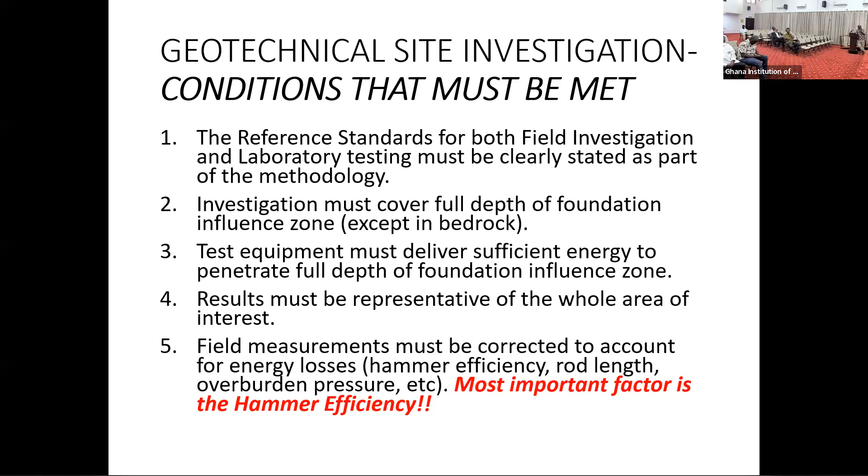The depth of investigation is critical for settlement analysis. It is influenced by the magnitude of the applied load - the bigger the load, the greater the depth you must be interested in. And the depth of influence of the imposed load is below the depth at which the load is applied. It's not necessarily just from the ground surface, but the effect takes place from beneath the loading point. Then, of course, the geometry of the plan area of the stress area - if it's rectangular, if it's a strip, if it's a square - all those things affect the depth of investigation.

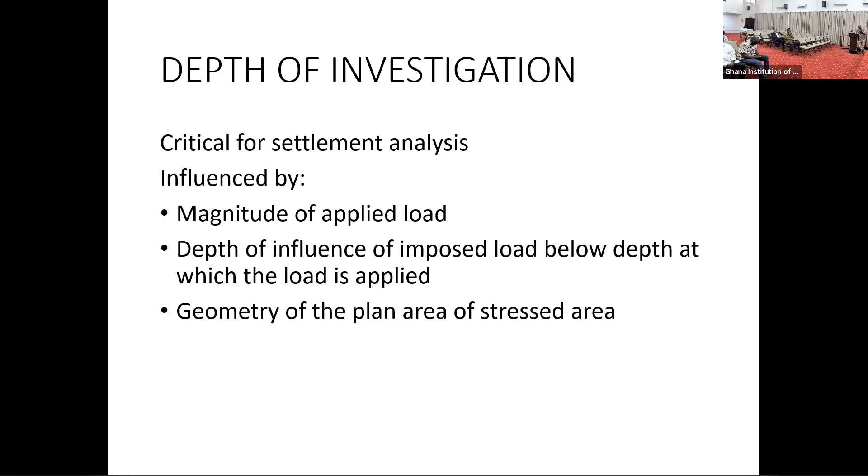There's some guidance for the depth of investigation. These days, the Eurocode has become very popular. Eurocode 7 is very clear. When we started, I said that the reference standards must be clear. If you go to Eurocode 7, it tells us what the depth of influence should normally be.

So you see the first one is a rectangular footing. So for a breadth BF, it has a certain depth of influence. The other one is more like for a basement or a structure - that one also has a certain depth. The next slide gives us guidance on the depth.

I jumped this one. For high-rise structures and civil engineering, this is from Appendix B in the standard. It's not what I think, it is what the standard says. For high-rise structures and civil engineering projects, the larger value of the following conditions should be applied. The ZA typically to be greater than or equal to 6 meters - by this it simply means the minimum it must go is 6 meters. And the ZA is 3B.

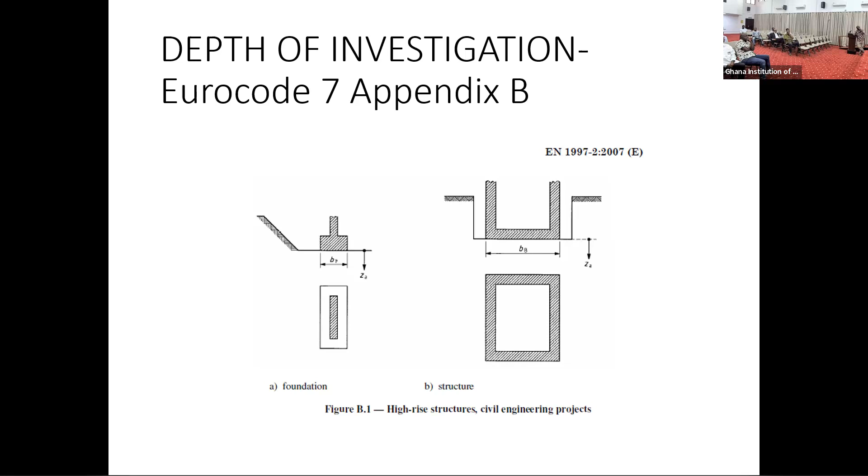So for ZA, this is the first diagram on the left. If it's an isolated pad footing, what they are saying is that depth of influence, you must go to a point 6 meters below the footing. If it is more like a basement structure, there's a BB - that one is 1.5 times the width. That is what the standard says. And then there's also some guidance with the raft footing.

All I'm saying is that if you choose to operate under this standard, be guided by its steps. Don't just do anything and then walk away. See that you are operating under the Eurocode. Once you're guided by operating under this code, this is the guidance.

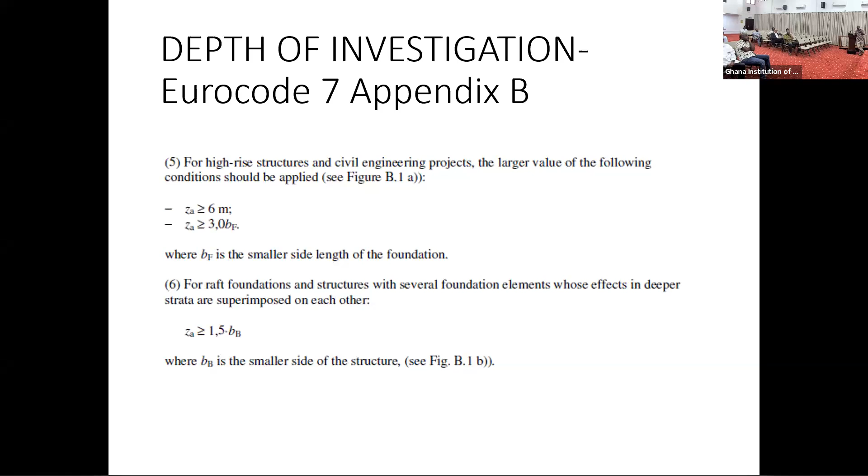Typically, how do we do this geotechnical investigation? We have the geotechnical side for drilling, SPT sampling, pit excavation, plate load test, dynamic probing with window sampling, cone penetration - all the geotechnical, intrusive methodologies. Then we also have the geophysical, which to a large extent is either seismic or at times electrical resistivity. The combination of these two approaches tends to give very comprehensive and representative data. If you combine them well, the information you get allows you to do a good design.

When you hear that there's a tremor, you don't wake up at night thinking, is that my project or what? That's the whole thing about doing the right thing and using the standards. So if you combine two approaches for a typical field investigation, you can sleep well.

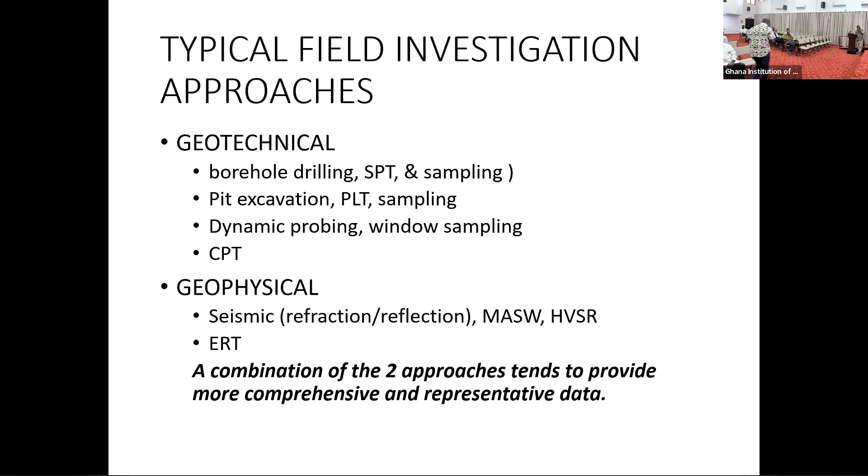So let's look at the approaches. The standard penetration test - under the Eurocode, that's the reference, BS and ISO. Now all countries have combined their standards together and have a unified group, and under this unified 22476 part, they have a standard penetration test.

Everything you need to know is there.

This is the most universally accepted geotech field test procedure for assessing ground strength for structural foundations. It's very useful in granular material, especially sand and gravels, which tend to be difficult. So for me, that is a standard practice. All the other things we do, we are trying to work towards that.

It has a very high hammer driving energy, 238 kilojoules per meter squared. Because of this level of energy, it is able to penetrate most types of soil formations, at least the ones we encounter in this country. So the full influence zone is covered, typically up to 15 meters, at times more. When you use the SPT, that is actually the standard, but it is not always that good access to the SPT, but that is the standard practice. It has ancillary tools that allow you to go through very hard material, chisels and all those things.

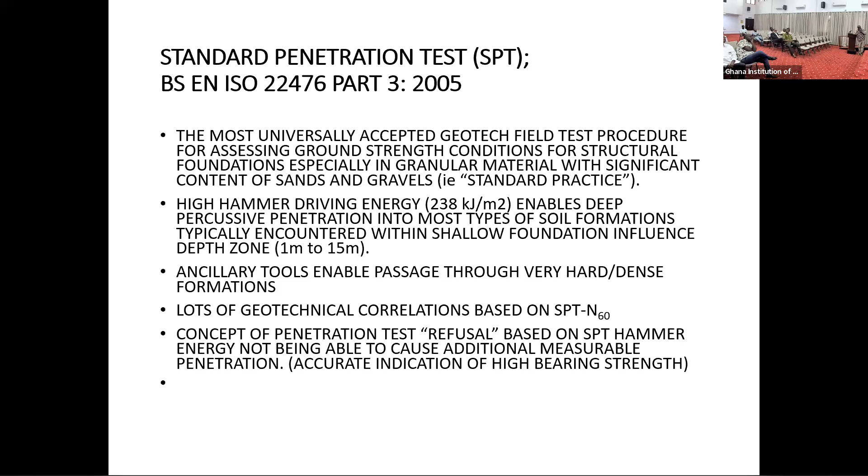So the SPT is a standard, but in addition to the SPT, there are other approaches, like dynamic probing for foundation investigation. That is the same standard, part 2. BS EN ISO 22476 part 2 talks about dynamic probing, part 3 is the standard penetration test.

Dynamic probing describes four procedures, differentiated primarily by the hammer weights. There's DPL, which stands for dynamic probing light. We have dynamic probing medium, dynamic probing heavy, and dynamic probing super heavy. They all have their energy levels.

Now the basis for selecting which type to use should be the drive energy. The driving energy basically means the hammer must drop by gravity, free fall, for a certain distance. For the SPT, it is 63.5 kilograms dropping 750 to 760 millimeters. That is the hammer energy. All four of these have their own energies.

So in any particular situation, you must look at your formation. That's how come we say this geotech business should be done by people who understand the geotech thing and the geology and all that. You must look at the formation before you decide what to go for, bearing in mind that you have to go through the full depth of influence.

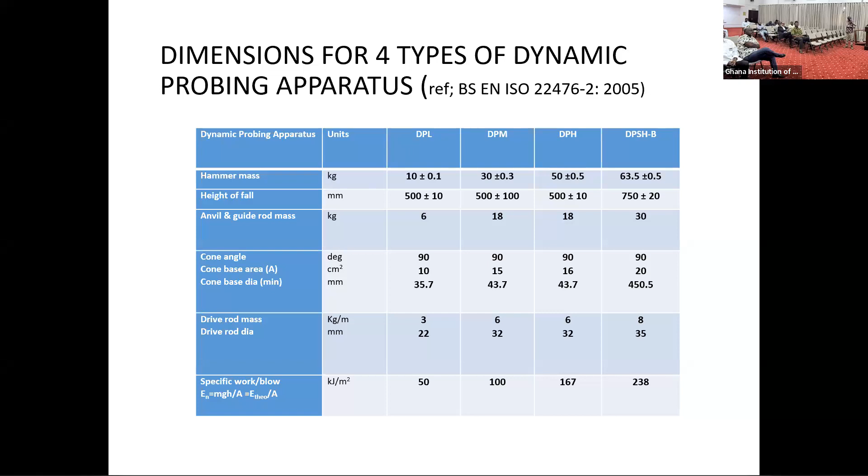Okay, so let's have a look at the 4 types of dynamic probing apparatus. The reference is still the 22476 part. All of this is just extracted from it, none of it is mine. This is in the standard. Okay, so the hammer mass.

The DPL, which is the light equipment, has a hammer mass of around 10 kg plus or minus 0.1. There's an intermediate one which has 30. And then you come to dynamic probing heavy, that one is a 50 kilogram drop weight.

And then the DPSH, I have to mention because there are basically different types of DPSH. Some prefer to use the 20 centimeter increment, but the DPSH typically is 10 centimeter depth intervals. The height of drop: the DPL drops 500 millimeters, DPM 500, DPH 500, and the DPSH drops 750. So the DPSH, in terms of energy, is actually equivalent to the standard penetration test.

The rods also play a part in the interpretation, so you must know the weights vary. The lightest one is 6, goes to 18, and the DPSH guide rod mass goes up to 30 kilograms.

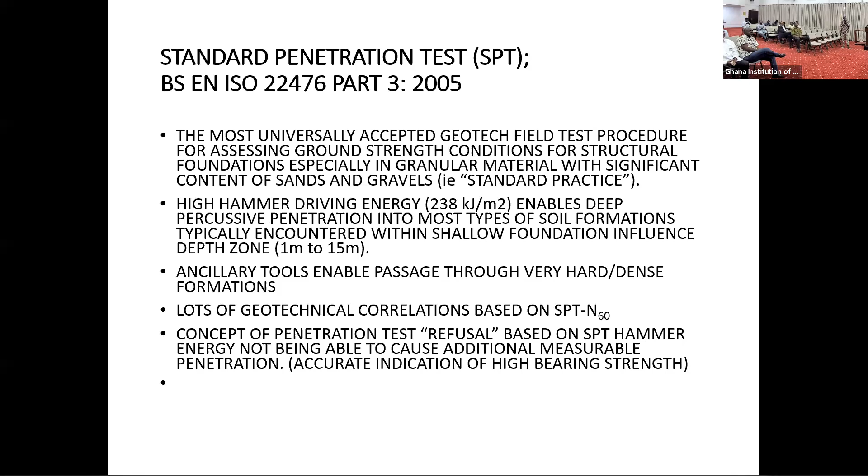When you go back to the SPT, it has the same value, 238. The difference between the SPT and the DPSH is the fact that the SPT drives an open sampler, and the SPT is carried out in a borehole. Because of that, there are a lot of energy losses in the DPSH which don't occur in the SPT.

So you must know all of this before you try to interpret the results. Don't just equate them - I've seen reports where some people think the two are the same. They are not, they are not. The side friction is different. All sorts of things are different, but you must have this basis before you can have a good appreciation of what's happening. So this is the information on the 4 types.

And like I prepared, these are dynamic probing. So normally when I say DCP, I don't need any of this - I do not mean the light system, that for me is not DCP. So my sermon here today is not on the DPL, I am talking of the DCP: evaluation of dynamic probing results.

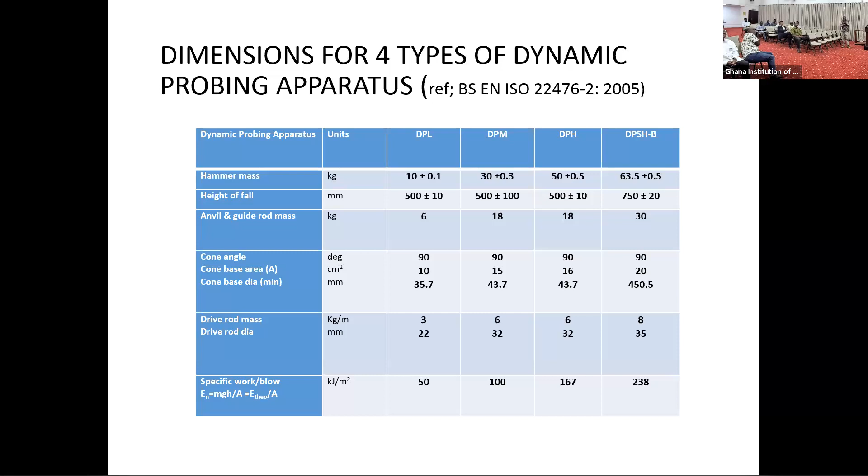You see, when you use this to generate results, they must be evaluated quantitatively before you can do anything with it. Now the principle is that though we say the thing has an energy of 238, that is a theoretical maximum. Each machine has its own peculiarities, so in reality we do not get 238. So roughly speaking, we have to calibrate these rigs, the same thing we do with concrete cube crushing machines.

The same thing we do with the Schmidt hammer - every machine must have its own factor, so that when you are doing work, you are a bit confident. Once you calibrate it properly, you get to know what the actual energy is. And in certain countries they are very, very insistent on that - in South Africa and things, you can't just go and put any machine there and say this one, this weight. No, it doesn't work that way.

And consideration should be given to the influence of rod friction by side adhesion and rod bending on the recorded test values. Those of us who've done DCP a lot, when you finish and have to bring it out of the soil, you know that something is holding it. So don't just hit and say this and walk away - you have to take all of this into consideration as you're processing the data.

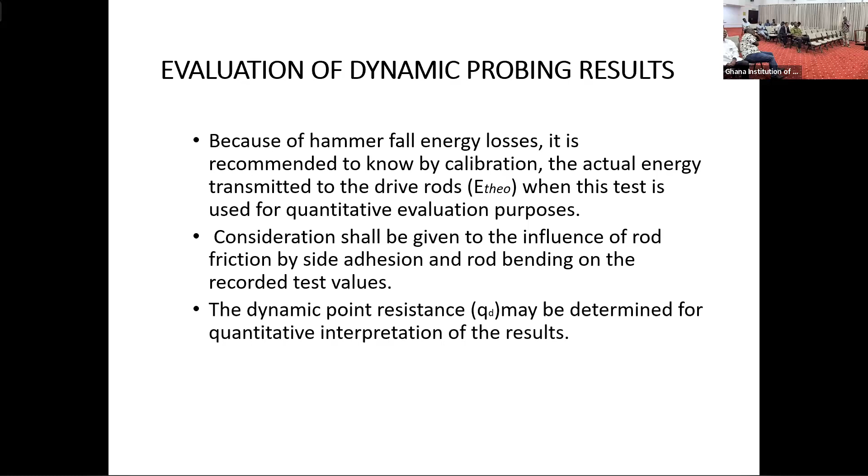So the ultimate goal is actually to determine the dynamic point resistance, and then we use that with the quantitative assessment. Then we come to this.

Basically, what is it? It has a drop weight of 8 kilograms. The anvil and guide rod weight is normally around 6 kg. It has a drop height of 575.

575 millimeters, that is the drop height of the DCP. And as such, the maximum energy it can deliver is 46 joules. That is mass times acceleration due to gravity times drop height, giving 46.

But this 46 actually is not the other entity I was referring to. This is not the work per area. When you do the work per area, you come to 92 kilojoules per meter squared. But this is just the energy, the kinetic energy that becomes potential energy.

The diameter of it is typically around 20 mm. It has a cone angle of 60 degrees. The effective investigation depth is 800 mm.

This one is from literature, basic literature, but it can be extended to 1,500. But the effective depth of a standalone DCP is 800 mm. It is primarily used for in-situ strength testing of flexible pavement made of unbound material, road embankments and things like that. That is the primary use of it.

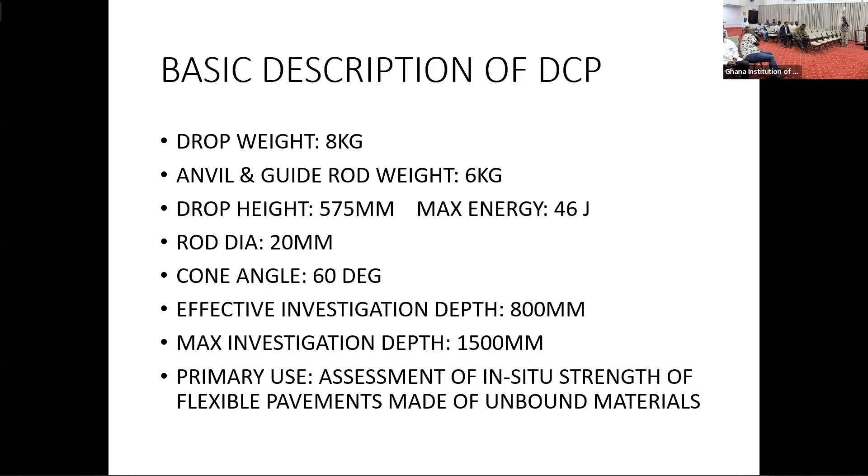When you use it properly here, you don't have a problem with anybody. So let's compare the DCP and DPL. The hammer mass: the DCP is 8, the DPL is 10.

The drop height: one is 575, one is 500. The cone areas: one is 5, one is 10. Cone diameter, see the difference between the two: one is 20 and one is 35.7.

And then the rod diameter. So the first point of interest, you see the cone diameter and the rod diameter. When you take one from the other, you get the clearance around the rod: 4mm for DCP. So those of us who grade, when you split 4mm by 2, you are talking of 2mm on each side of the rod.

So once it enters the ground, it's moving with sand. I mean, the friction is so high that you can't believe it. But look at the DPL: it's 35.7 and 22, the allowance is bigger. It is designed to try and minimize the side friction. So there is a difference between the two.

A lot of the time, people just look at the energy. If you just look at the energy of the two, one is 46, one is 50, you think that they are close. But then the energy is applied to a certain area. When you do that, one is 92, one is 50. There's a difference, because the cone area of the DPL is different from that of the DCP. And the DCP side friction is far, far bigger than the DPL.

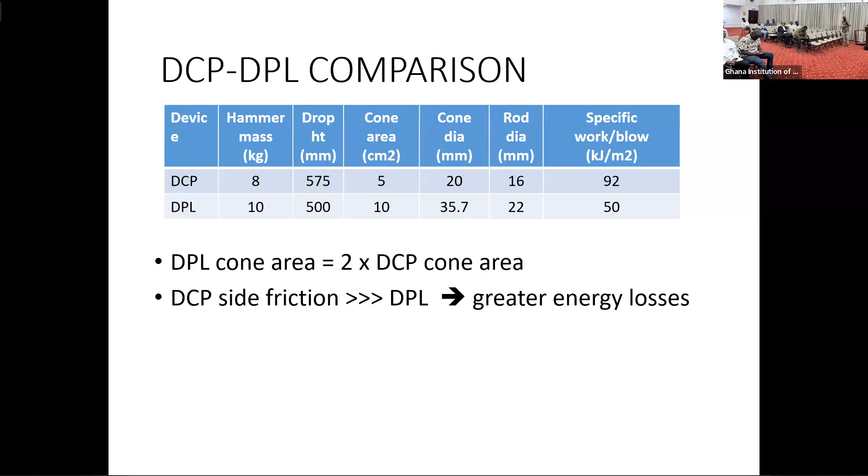The limitations of the DCP: when you go into the standard I referred to, Annex D gives you some ideas about what the limitations of the DPL are, which now we can compare to this.

The driving energy really is not much, so it's not able to penetrate dense soil strata, especially when there are pockets of sandy gravel, decomposed rocks at shallow depth. It really can't.

Then, like I mentioned earlier, there are significant energy losses to side friction due to the extremely small clearance around the drive rods. So actually, after a while, when you start getting large blow counts, they are not necessarily because the formation is dense. No, it's because you have a whole lot of friction and you are working against it. So you are dealing with friction now, not the end bearing that is the issue. It's the friction along the side rods.

And this can lead to a lot of misinterpretations. So the cumulative energy losses from inertia, look, as you add rods, the metal tends to absorb a lot of the impact energy. And then the side friction also increases. So you see that the effective depth of testing, the influence zone, is not much.

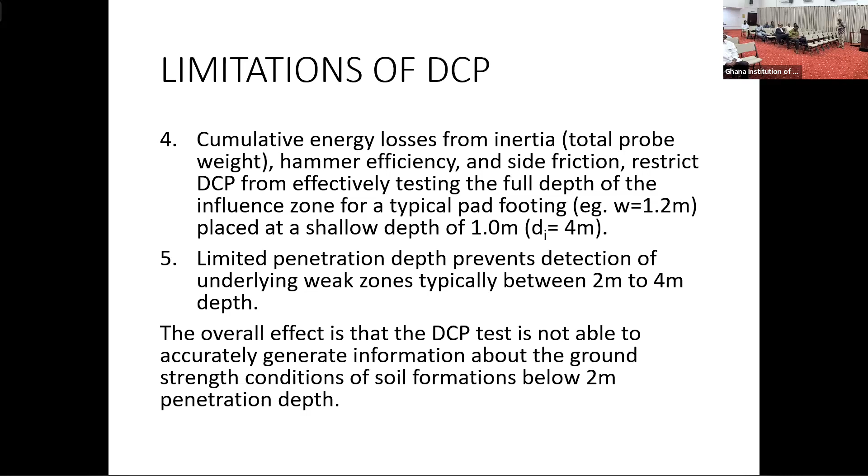So typically they are made between 0.5 and 1.5. If you take 100 DCP reports, about 80 would be around that depth. That's where they terminate them. Then you add 1 pit to it, and then make a declaration for the whole site. So within a day, they are finished.

So when they do, yes, 1.2, alright, then they stop. And then add a pit. And then you will find very, very high bearing capacities assigned to depths of 0.5 to 1.2, especially in the gravelly, sandy, lateritic soils. Oh right, we have it all the time.

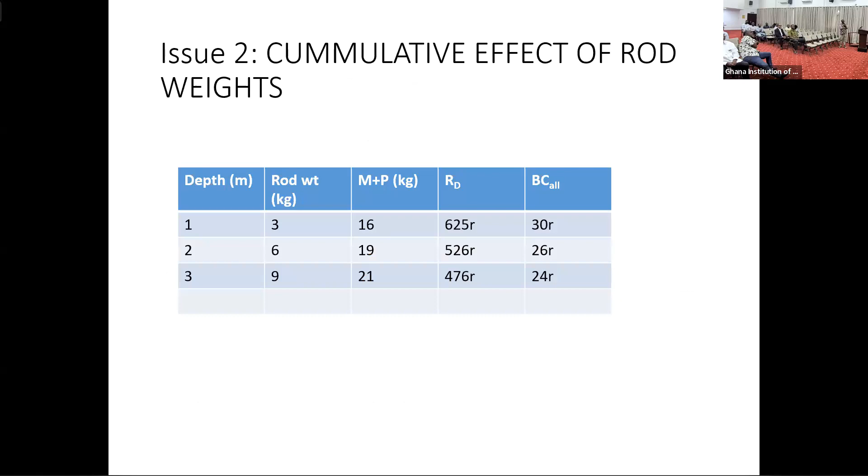The weight effects of the additional rods are not factored into the computations. And of course, the field measurements are not corrected for energy losses and friction losses. So the data we are working with right from the beginning is wrong. According to research, typical energy transfer ratios in these hammer systems, especially the manual one, range between 0.4 to 0.6.

And the DCP release is manual. If you watch the boy doing it, he does the first maybe 50, then that time it doesn't hit the top. It's tight. So you are not getting anywhere, and they are telling you that it's 0.4 to 0.6. So you think you are dropping a 10 kilo weight, but the effect is instead of 10 kilo times 0.5, you now have the same 10 kilo times maybe 0.3 G. So the overall effect is a gross overestimation of the soil resistance.

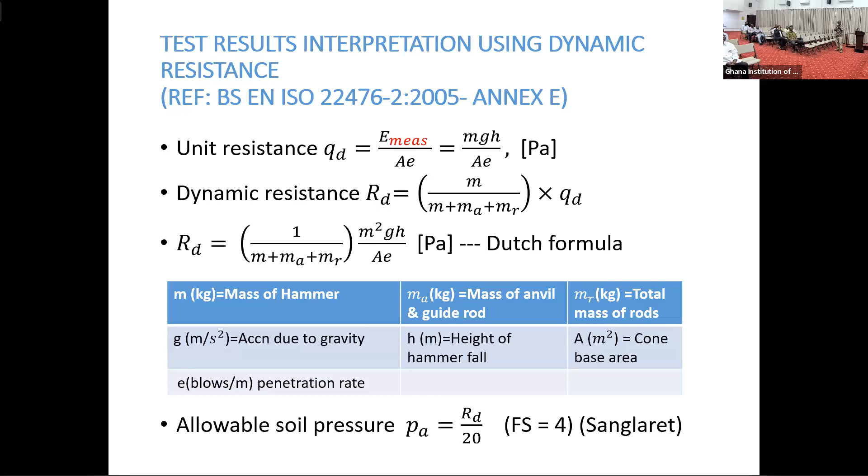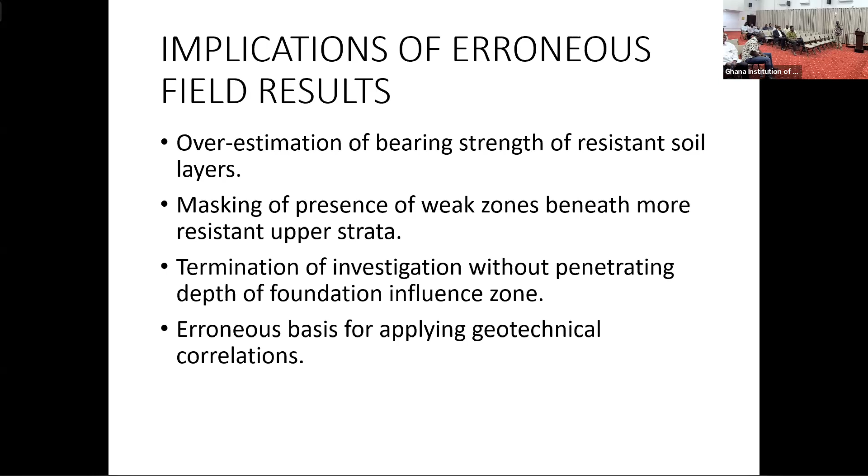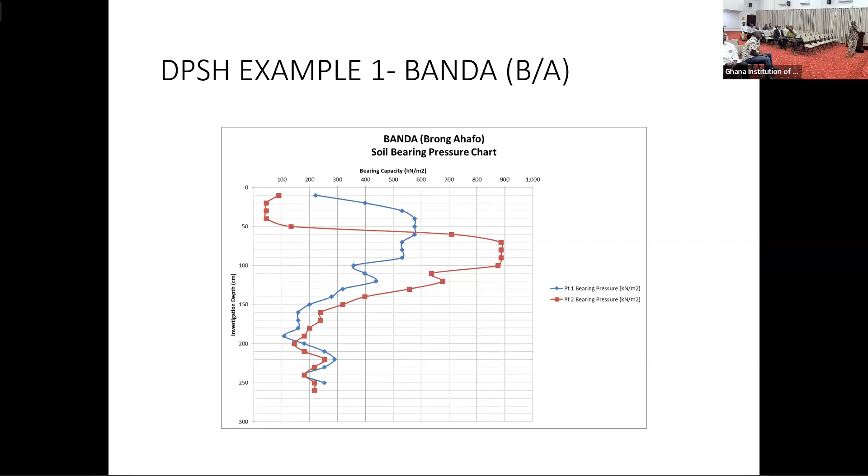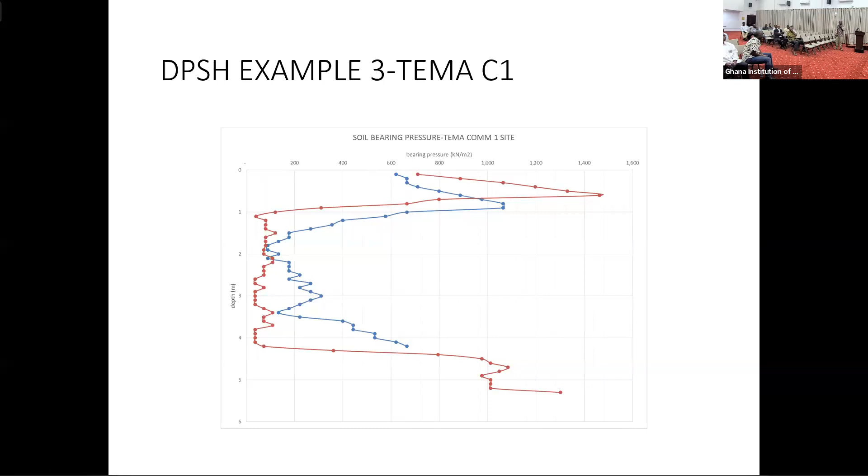So we've done Banda, the second one was Kumasi. This is Tema, this is North Dzorwulu. Similar pattern.

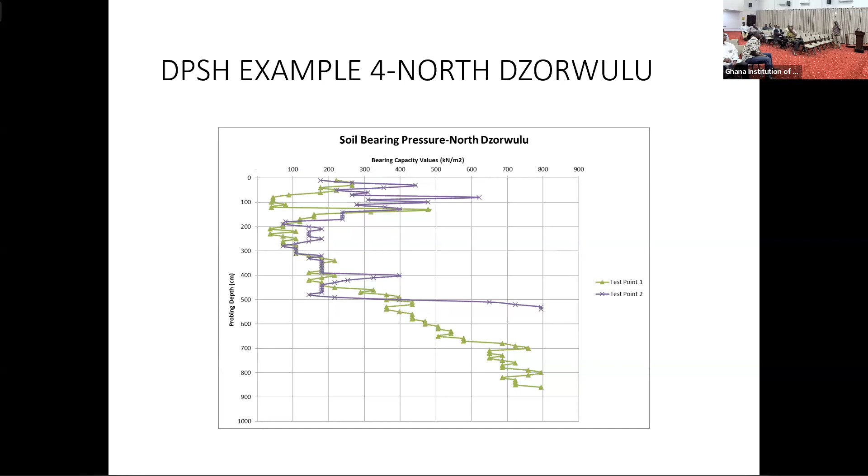Now, this one I've seen already. What we've seen is that because this DCP thing has become so rampant, it is undermining our efforts to attract investments in standard geotechnical equipment. Between the time Engineer Ode wrote that and now, I'm saying that it almost tripled what was in the country.

Now it's flat out, because the machines are mostly standing idle. People are walking around with DCP, and with that kind of thing, Q equals 30R, that's all - so the machines are standing. So it is not an issue that we don't have it in this country. The issue is that we are not rotating it well enough, and because of that all that investment is standing idle, and people are doing the wrong thing. They are doing it wrong all over the place.

So I'm concluding that the use of the DCP test equipment as the primary field test device should be discouraged. That is my conclusion, but I'm not just ending there. What's the way forward?

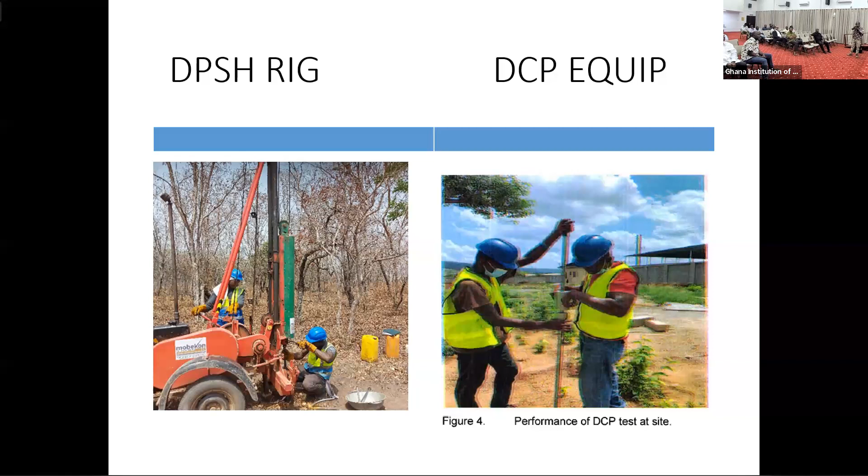This actually is equivalent to an SPT machine, yes, even though this one has suffered friction losses and all that. So it's this kind of thing that we are talking about. I'm done, thank you.

Oh, okay. Thank you very much. I don't see your hand raised. You see, because this subject or aspect of geotech is highly controversial, we have 100 people online.

Seriously speaking, when it comes to the question, I also add my words on the conflicts or the kind of errors we have with DCP, but I won't talk too much. We want to move on to the second presentation. Are you ready? No, we want to move fast so you can put your questions later. We want the second presentation to come. Otherwise, please don't go. No, don't go, in Africa you can't go. No, Solo is here.

So Kofi Enyinabwatin will be talking about another aspect of site investigation. By this time, what Engineer Pedro did is more of an invasive approach, the DCP, blah blah blah. But Engineer Bwatin will talk about the non-invasive, which is more of physics, how we incorporate physics into our site investigation. It has become another useful area that helps geotechnical practice. We cannot shy away from it, so we allow people to start the process for us.

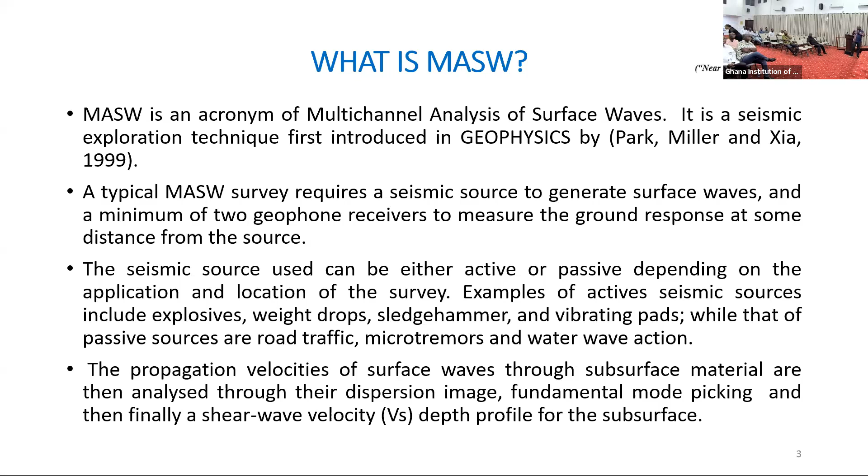And then again, another area, secondly, somewhere in Western region, we again used the line streamer. So you hammer onto a nylon strike plate, the energy goes into the ground and it disperses. The dispersion is then analyzed and then we come out with the phase velocities in each of the dispersion images. And from there, we're able to get the depth profile, the VS depth profile for the subsurface.

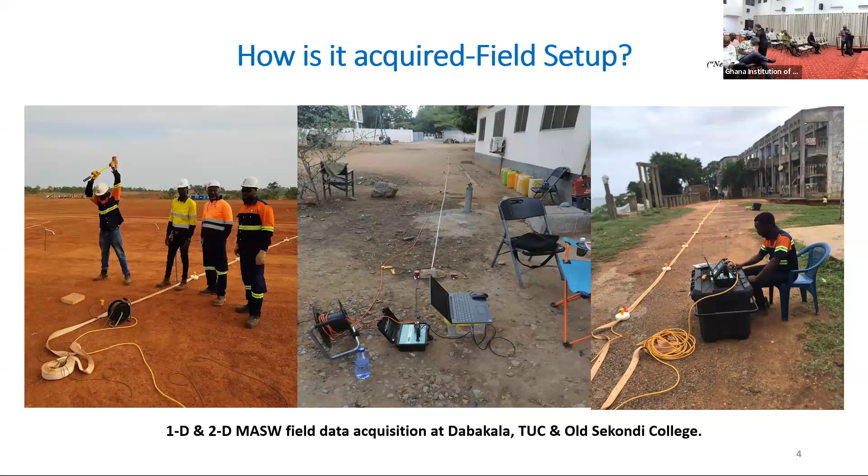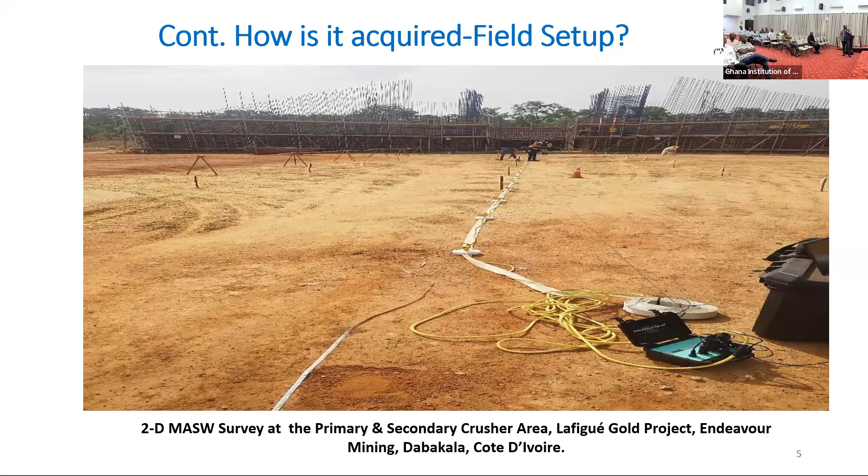This is the same site in Côte d'Ivoire around the primary and secondary crusher area. The designers of the plant or the crusher area wanted certain parameters to be used for their design, and that was basically the shear modulus and the elastic moduli of the subsurface material. Again, another site within the same area, the screening area, on the same Lafigué Gold project site.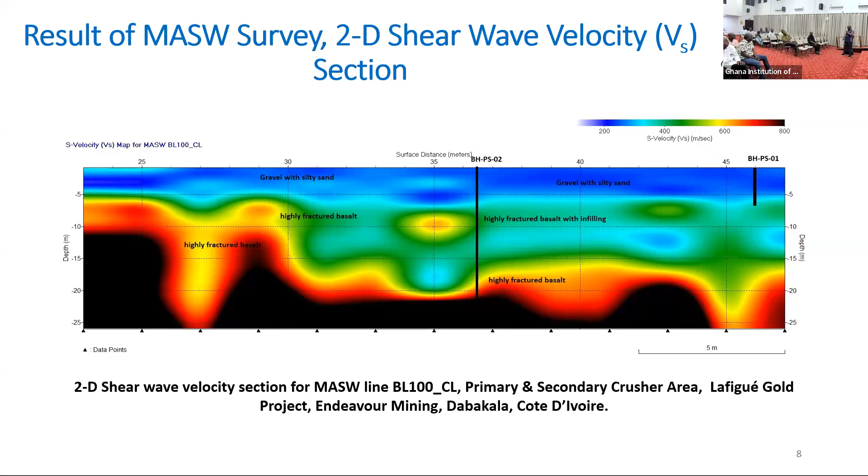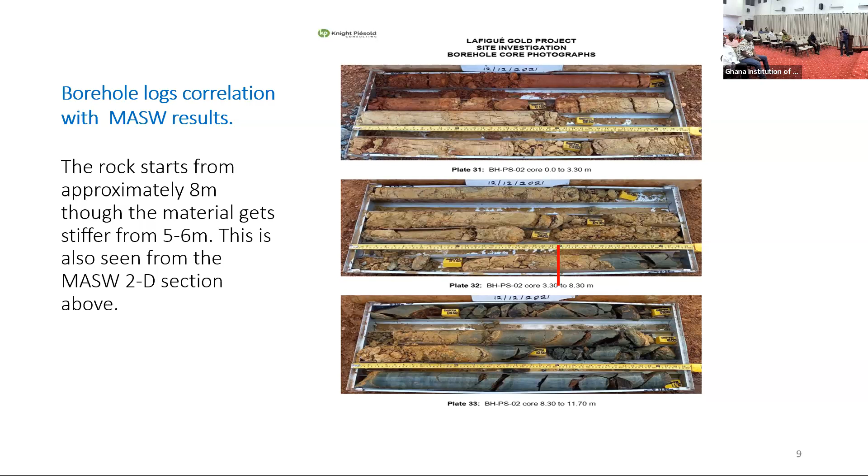So we continued again, and then compared, and this borehole terminated, I think, around 28 meters, which made a lot of sense with what we did for the client. So they were free and very confident to use the G, and then the elastic moduli parameters and the Poisson ratio and all that.

Now, so what information does MASW provide? Shear wave velocity is a direct indicator of ground stiffness. We talk about stiffness, we're talking about the resistance to deformation, which is ultimately related to what? The ground elastic moduli.

So VS is also one of the elastic constants and closely related to the shear modulus, Young's modulus, and commonly used to derive other engineering dynamic parameters. So out of the VS, we're able to calculate or derive the Young's modulus, the elastic moduli.

We're able to also get the shear modulus. We're able to get or calculate the Poisson ratio. We're able to also deduce the density for the subsurface material, because the shear modulus, the VS, and density are related. We're able to also come out with some estimated SPT N values. I've done this with a couple of sites and they are not far off.

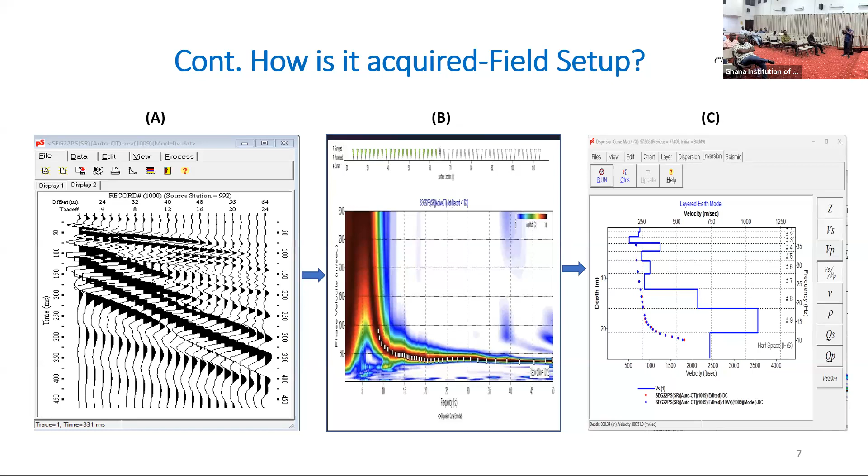We can also use the VS as an approximate method for subgrade reaction calculations. I came across some pump tests by Gazetas, 1983, which Engineer Day also shared with me, and that's what he has been using.

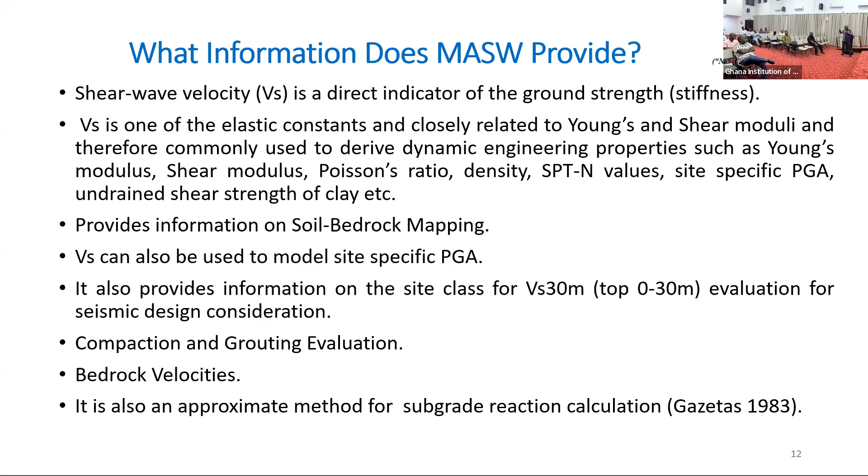If you connect these two boreholes, ideally some might say, because we terminated here, the bedrock is straight along this line. No, but you can see the rock head changes with the topography as well. So again, the shear wave velocity or MASW is able to give an indication as to how the rock profile, or the bedrock profile itself, is.

Again, we can also use the VS once obtained to model and come out with the site-specific PGA. Usually I choose to use the Chichi magnitude 7.7 earthquake, which I think happened in 1999 in Taiwan thereabout. I know we haven't experienced a magnitude 7.7 earthquake in Ghana yet, but that is what I normally use for my model. I go to the extreme to model and get a site-specific PGA with depth.

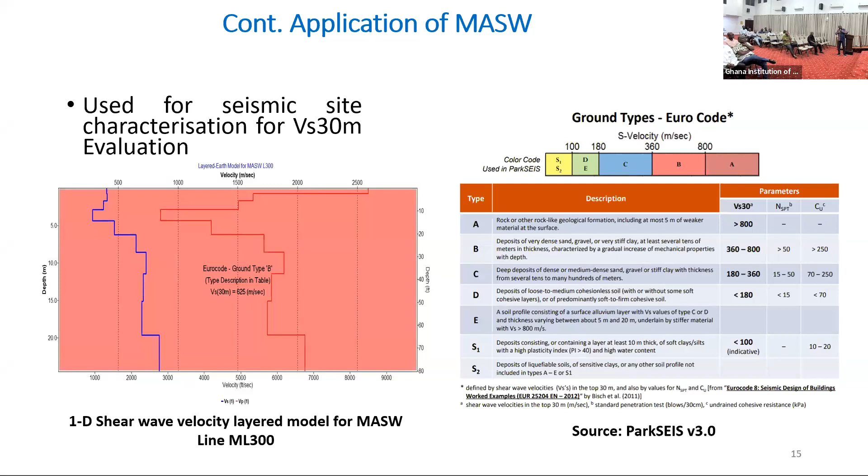So for the same seismic line MASW 300, this was the site class we determined for the site. We're having an average shear wave velocity of about 625, which falls into site class B. And you can see from here, that is the site. This particular site is what we modeled to come out with one profile for this whole length of line.

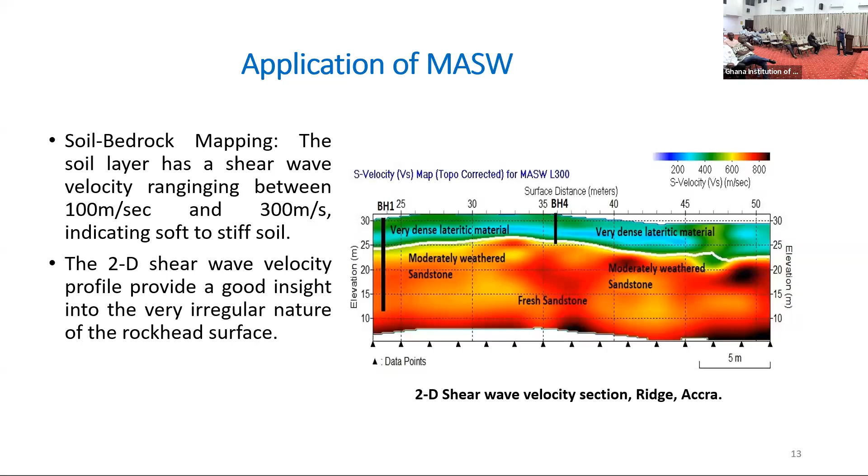MASW again, I think I've spoken about this already, about compaction. It wasn't part of our exercise, but that is something I noticed when I was analyzing the data. I noticed, okay, let's see what happens, and truly, while you see some areas appear to be well compacted, this confirmed it. This is also from ParkSeis' website. He did some work recently for the Minnesota Department of Transport, where they have now used MASW to evaluate compaction on roads. And this is what they are doing, and we can also try to mimic that today.

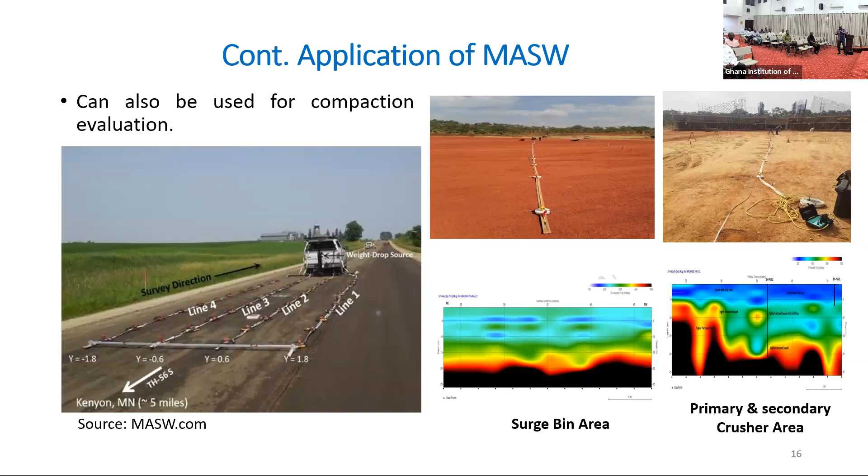Bedrock velocity. If you see this dispersion image, this is also another site in Jowli. With this work in Jowli, you could see again a constant velocity - these are the shallow layers, with the higher frequencies, and the lower frequencies giving us the deeper layers. Low frequency, the same basic equation: V is equal to F times lambda. That is what we use in coming out with all these velocities. So once you have longer wavelengths, you have low frequencies, and then deeper layers, and with high frequency, shorter wavelengths, and then shallow layers.

So we could see the deflection point here, around, let's say, about 3 meters. If you do the calculations, about 3-something meters around, it changes - the ground changes to become much more steeper, getting into the bedrock velocities. So MASW again, you can use to do what? To identify or locate the bedrock velocities, or determine the bedrock velocities.

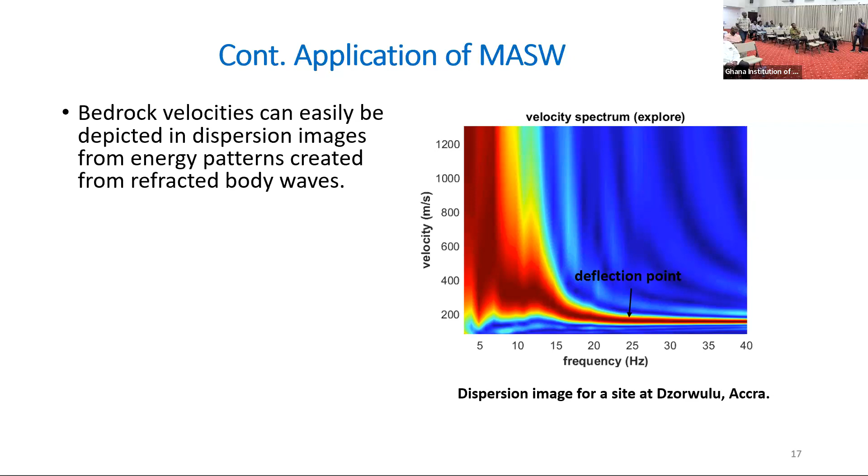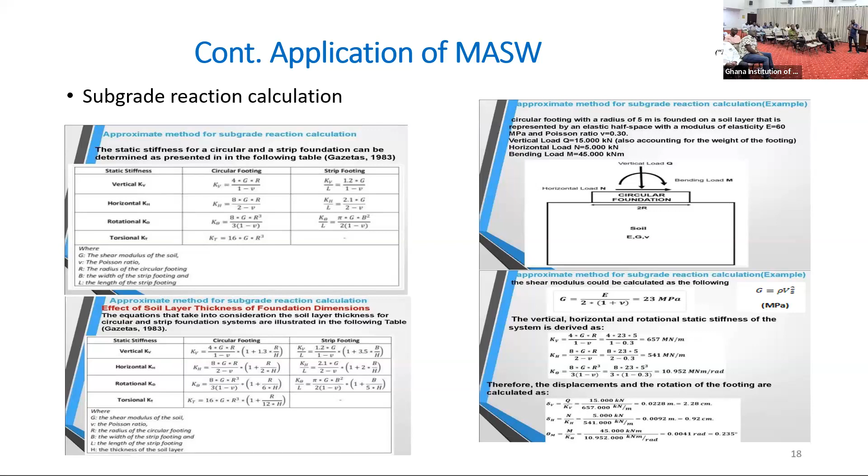Some advantages of MASW: it is one of the easiest seismic methods that provides reliable results. In comparison to conventional drilling, it's fully implemented on the ground surface, non-invasive, and covers the subsurface in a continuous manner providing complete coverage. It is also cost-effective, efficient, and a quick way to assess the subsurface and complement available geotechnical data.

You cannot just do MASW and ignore other geotechnical models. No. Section 5 of BS 5930 requires that you consider geophysics in any ground investigations - any geophysical method to complement geotechnical borings for your site investigations.

MASW also overcomes the limitation of traditional geotechnical techniques that can only give limited and localized information due to lack of lateral characterization. Assuming the 2D section I showed, if we had to drill a series of boreholes to characterize the site in that long profile, we would have to drill many boreholes before we can connect them together and make meaningful interpretation of the subsurface. But with MASW, it's easy - if it's 1 kilometer, you can run it. So assuming you have to get a whole profile for 1 kilometer with only 10 boreholes, that's also very expensive.

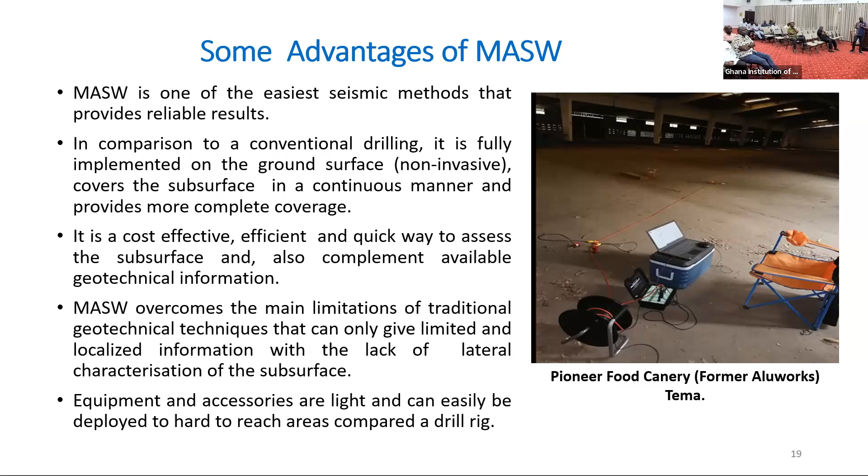So in comparison between the seismic survey MASW and the conventional drilling, you could see this site: they drill some two boreholes and try to connect or infer that, oh, that's how the ground surface behaves. But with the geophysics, we're able to show that the ground is not as it is here, but it's rather undulating.

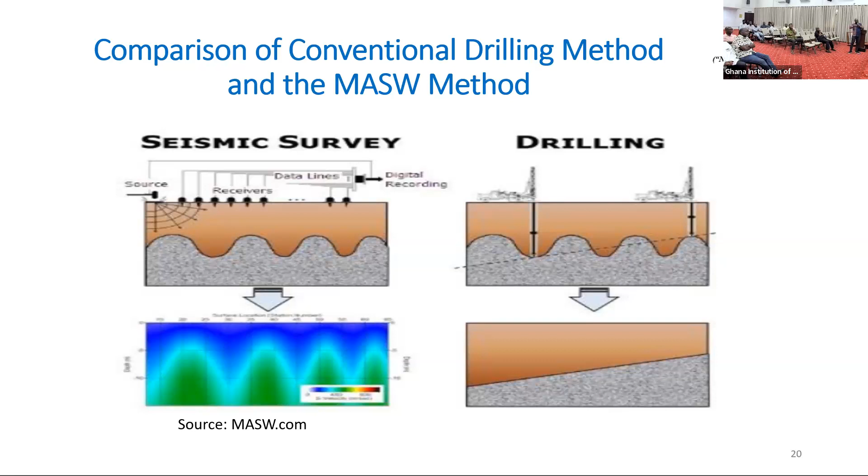This is a typical example from the previous slide I showed earlier for the ridge site. This is not an MASW section - this is a typical 2D refraction tomogram. I brought it here because it's a site investigated where they've already done some boreholes around, up on the ridge thereabout.

This is where the first borehole, number 6, terminated. The second borehole, number 4, also terminated around this depth. And after conducting this survey - the geophysics, this time refraction - you could see how the ground profile actually behaved.

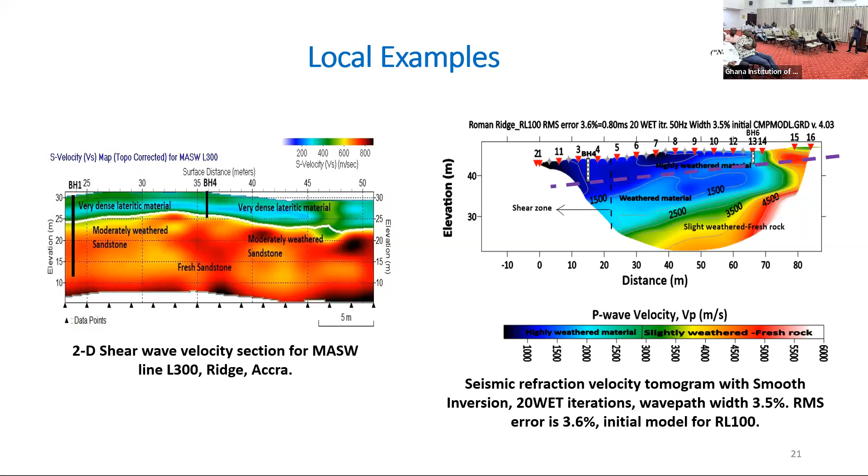And over here, we're going to put about 18 stories. So using geophysics, we're able to come out and understand the ground better compared with just having a few boreholes around and collecting data. You can easily miss something that is of great interest.

Now I come to passive seismic. Passive seismic is a horizontal to vertical spectral ratio method - it's a passive seismic method introduced by Nakamura in 1989. It measures the ambient noise produced by wind or ocean waves.

HVSR exploits the ambient seismic noise signal and estimates properties of unconsolidated overburden sediment. With HVSR, we are interested in the impedance contrast - when I say impedance contrast, we're talking about the soft layer and then the stiff layer. So what we obtain from HVSR differentiates these two, the soft and the stiffer material.

So by measuring the three components of signal over time, usually I use 10 to 20 minutes, HVSR can determine the fundamental resonance frequency of the overburden material - the sedimentary layer overlaying the bedrock.

By using HVSR, we should be able to measure the peak frequencies, and out of the peak frequencies we're able to get the H over V, which is the ratio or amplification factor - how the ground will amplify, and at what factor, should there be any ground motion.

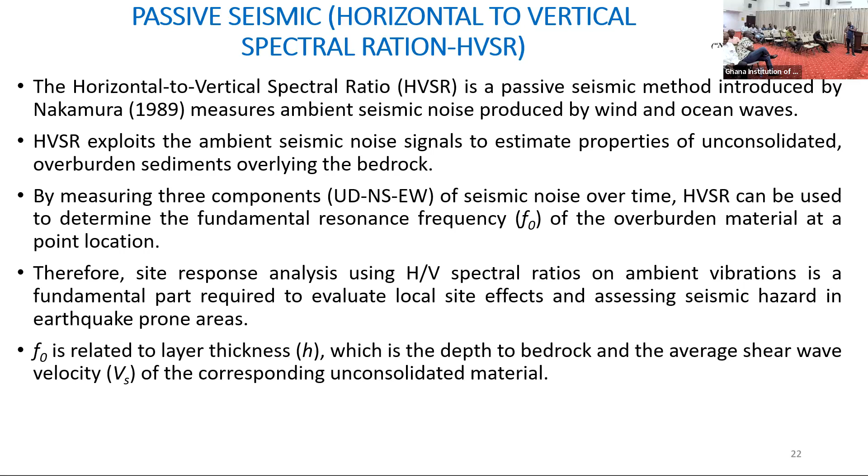This is a typical HVSR acquisition at a site at Roman Ridge. The north, south, east, west components of the ambient noise were measured, and then we analyzed the data using one of our industry software, HoliSurface, and also Sesame, under the Sesame criteria, to get the frequency for the site. This is a typical example. Here we had a site peak frequency of about 1.55 hertz and amplification factor of about 4.48, so we should be able to get the vulnerability index for this site.

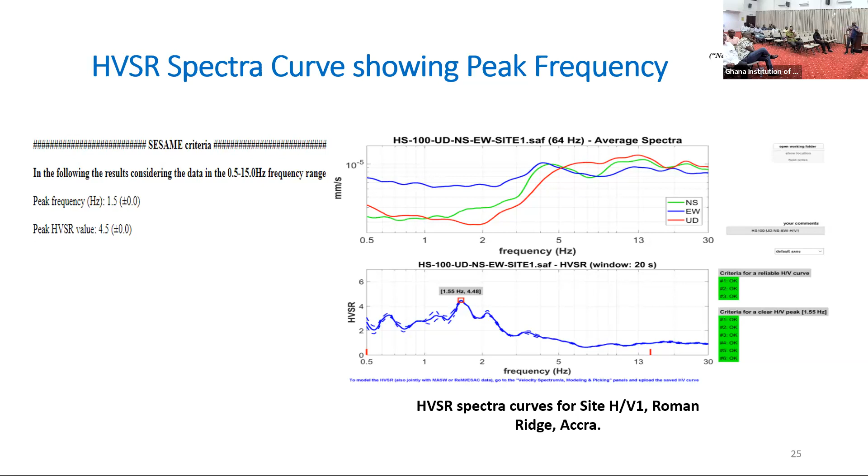Application of H/V: we use it to determine the impedance contrast, which I've already talked about, and also the vulnerability index can be calculated. We get the peak frequency, the site amplification factor - all can be determined using the H/V method or passive seismic.

HVSR can also be used to determine the dynamic characteristics of a structure through its modal frequencies. What that means is we can use the same HVSR principle to determine which frequencies a building, for example, was designed for, by picking up data along the axis of the building. I did this at one office, and you could see the movement ongoing within the building. It's very interesting - unfortunately I don't have a video to show.

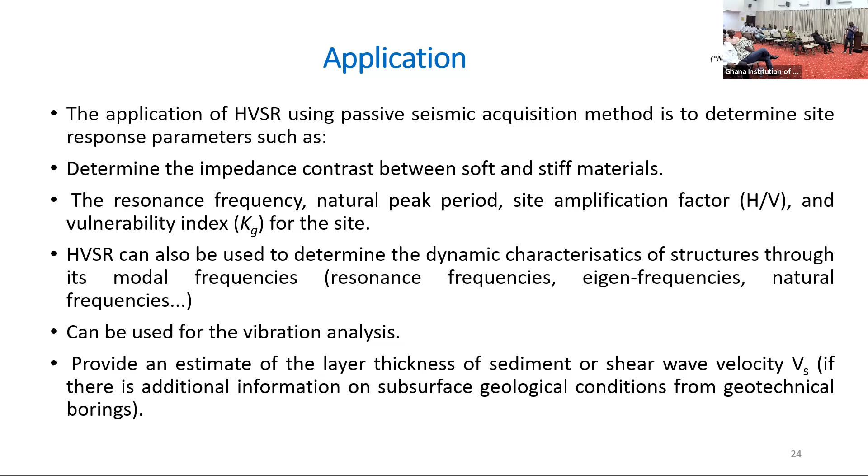In conclusion, the use of MASW and HVSR methods in geotechnical site investigations are a means of acquiring subsurface information to supplement available geotechnical boring data. It cannot be done alone - you need geotechnical information available to correlate with whatever physical method you use. You cannot only use physics and think that's all right. We don't recommend that.

Data acquisition is non-invasive and also quick to gather. In Dabakala, for instance, it was a 2-kilometer line, and within 4 days it was done. I remember we also conducted a similar survey at Nimwanda - half enough, it took 9 days, and then we still have the streamer to get it done. The streamer makes the work easier, simpler and faster.

Again, less labor is required. Usually 1 to 2 persons should be enough to acquire H/V or MASW data - just get someone hammering, and another taking care of recording the data. It is cheap compared with having to drill a series of boreholes to provide information in a continuous profile.

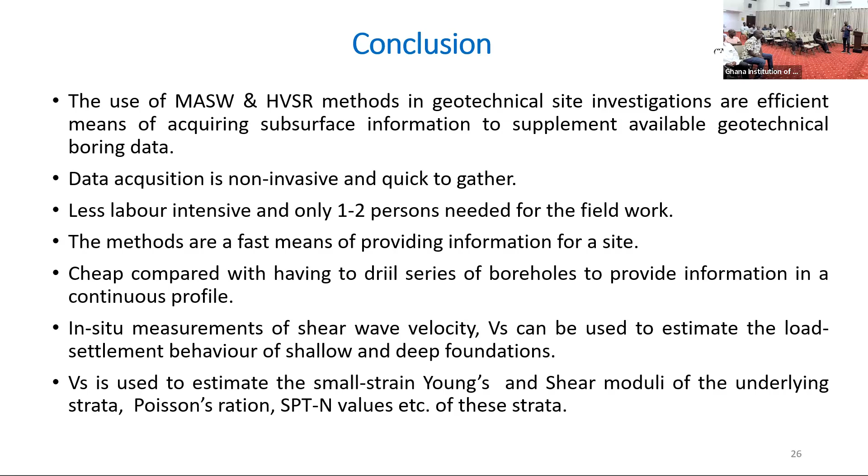Like I said earlier, if your picking of fundamental mode is wrong, everything about your VS will be wrong. So you need to understand it. Everything about your VS will be wrong. That's the end.

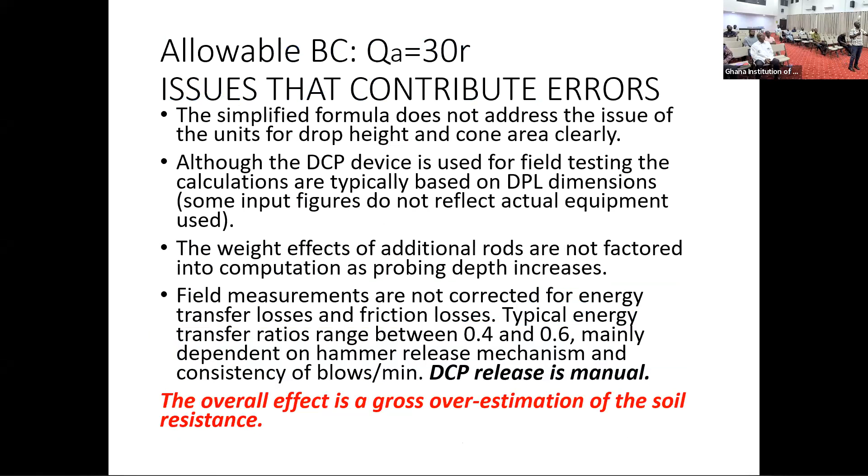RD is equal to M squared H. So what's the variable here? It's E, right? Because all the rest are constant for a particular length of rod. Yeah, for that particular case, E is the variable here. So we have y equals 1 over x, or y equals k over x, where k is constant. You see, so what does that tell you?

For me, it means that if you lifted the hammer, which is the reference, which is 0, it means H is 0. If you brought the hammer up, the DCP, that level is 0. So it means that H is 0. So if H is 0, what is R? Zero. So it means that if you put the DCP on the ground, it should move like it's going through water to move, but that's not the case. So in terms of physics, I don't believe in this equation. It doesn't make sense, so nobody should use DCP for their work - this defies the laws of physics.

Okay, so you don't need to use that. Do you understand the relationship? It's equal, it's behaving like y equals k over x, because the variable here is small, that's what we are measuring.

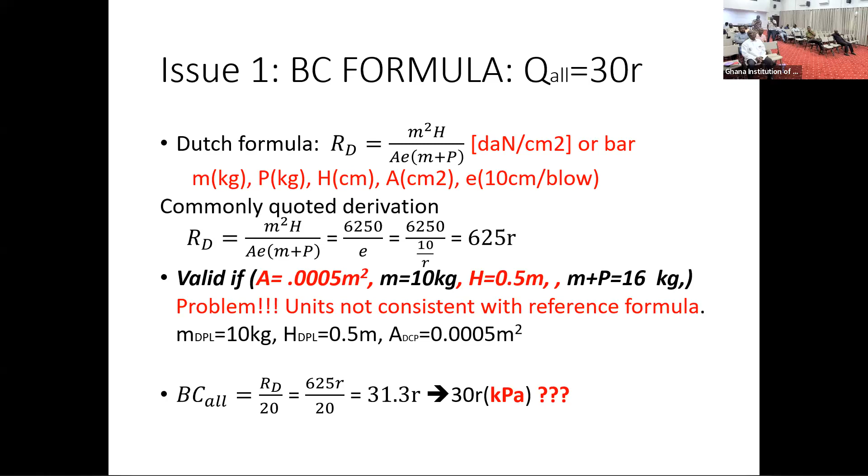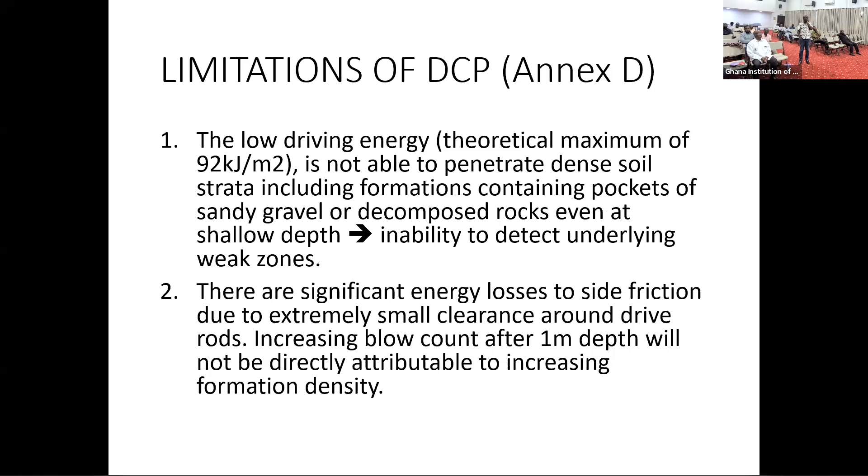Actually, the foundation was founded at, let's say, 1 meter. Yeah. Okay. Is that correct to choose that parameter as the foundation depth? Yes, and then apart from that, you mentioned the zone of influence, yeah. So you have to consider that whole zone as a factor.

So you see, and you are choosing that particular depth as your foundation depth. You cannot recommend 348 as the allowable or whatever bearing capacity you are talking about. You understand? Because you should think about the zone of influence.

That's why geotechnically speaking, if you chose 1 meter, what about if you look at 1.2? Because there is stress distribution below the footing. Okay, that is why if any structural engineer here asks you give me settlement, tell them give me the load.

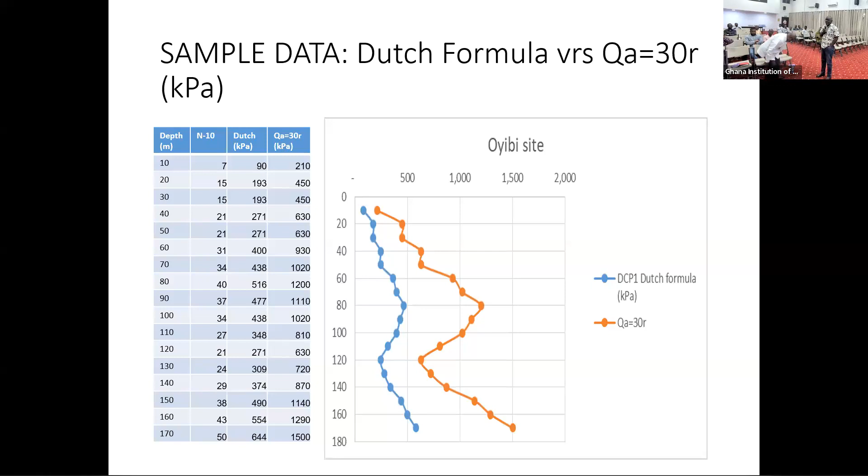Thank you very much. Chairman, you have a responsibility around, if you want to add. Okay, I think I have two comments on what is done. First, another excellent presentation.

One thing, I'm not a designer, but I've been interacting with a lot of structural designers. The PGA which has been published, if you go to it, they say it's protected, so sometimes it's risky to use it. If you want the correct one, I'd recommend some work be done on the field. Most structures, I don't think in Accra yet they've been using 0.35, something like that. Most local designers have been using between 0.2 and 0.25. That is by my experience that I have encountered.

Number two, when you look at the geophysical, he said advantages were that some equipment are versatile, less expensive and all that. It looks like the cost of conducting a geophysical study, sometimes it looks very good, and it's to give supplement to the boring geotechnical. So if you are going to do the technical investigation and you go in, please support me with some values.

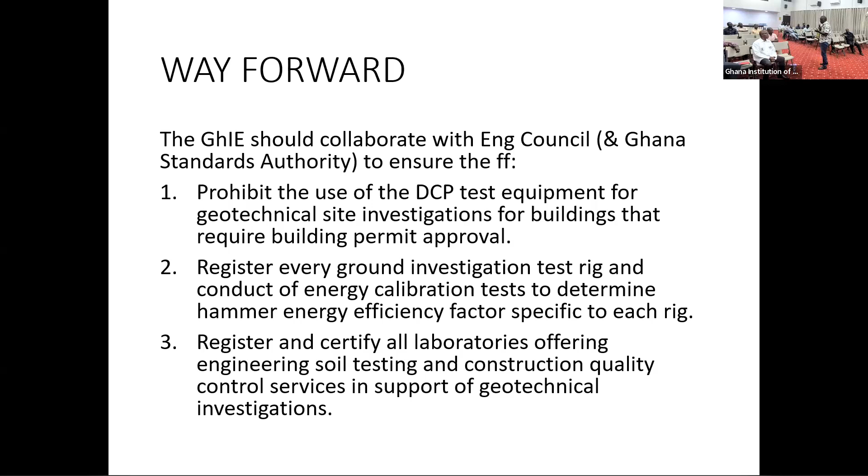Okay, then it depends on you, the engineer, in terms of your choice. You want to go extreme, or you want to be in the middle. So we are working on that. I'm sure by next year she'll be done with this and then move forward.

Yeah man, okay so Jojo, I'd like to address your concern. What we meant would be true, we want to prohibit the use of it. You see, it has reached a dangerous proportion. It's like a knife - knives can be used for a lot of good things, but we don't allow children to play with knives.

If academics want to continue researching so that later on they can give us good correlations that deal with friction and all the other issues - because, like I said, we want to have test equipment that can at least at 4 meters give us reliable results. If you can convince us that the energy of 8 kilograms of weight is enough, basically at 4 meters, show us how to take out friction and all that, and it's accurate, fine, then we'll look at it. But for now, we don't have that.

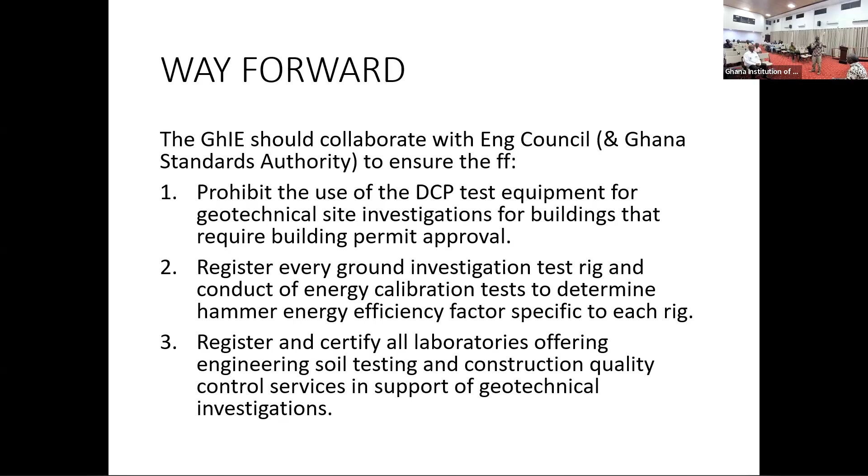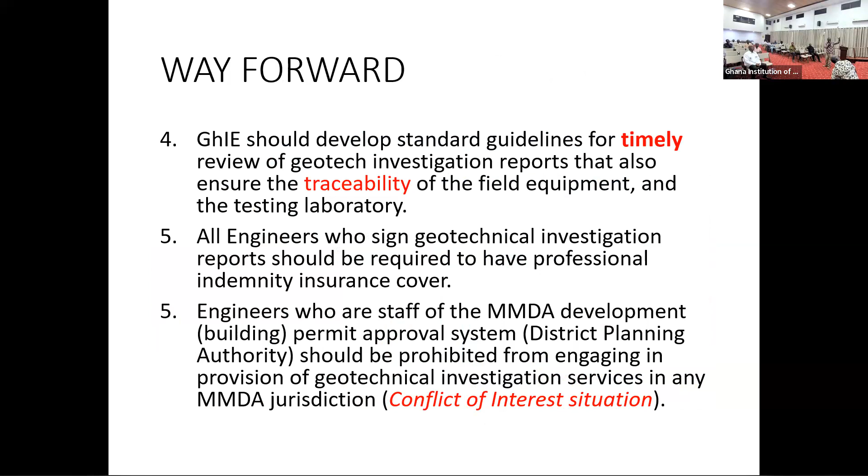What is happening now is because of this rampant use of the DCP, even the few that have come to the country over the last 10 years are basically just parked. Because if some young, dynamic young man tells you, 'I have a stamp, GhIE, I can write a report for you for 3,000,' why would you want to go and put some old man like Sabinka and pay 15,000? Immediately, they don't compare anything - he just checks, there's a guy with a stamp, yes, he says he'll write for 3,000.

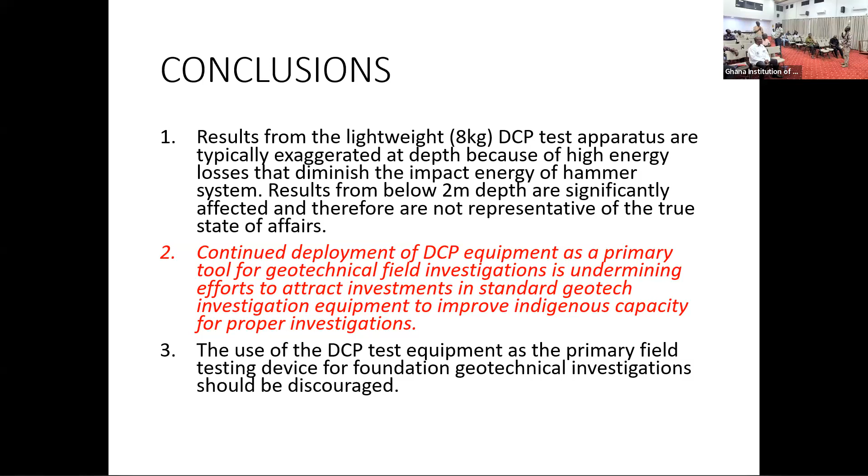As our senior man said, the institution - I don't know what position paper you people have on that. Now, I came across a consultant who is 3 years old after graduation. He got a professional stamp from the institution because he just had 3 years, but nobody mentored him. I think during his national service he happened to work for somebody in the technical area, so he was able to acquire a little knowledge, and after the project was over and he wasn't getting work, he sat home and became a consultant.